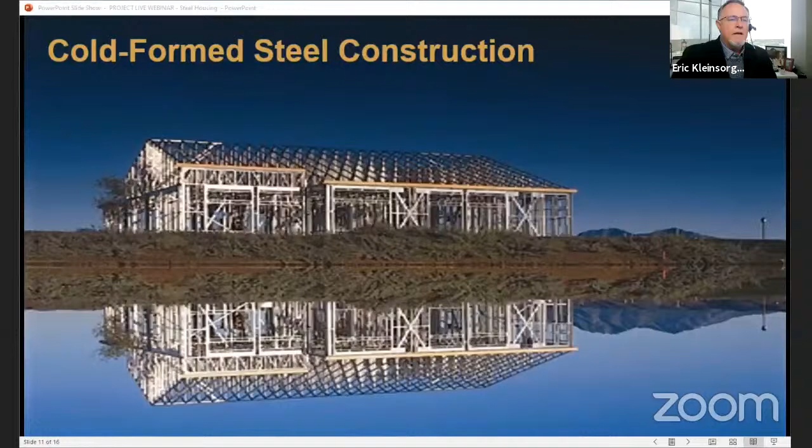So we feel Blair's project is right in line and falls within the scope of what our communities can help with. So at this point, I'm going to turn the show over to Blair. And Blair, if you want, come on.

Hey, Blair. So first of all, thank you for putting together this presentation. Again, it's about 15 minutes. It'll give you a background of the project and what their needs are. And Blair, as I stated, I'll kind of flip through them as you need me to.

Not a problem. To begin with, Eric, Ashley, and all of those that have joined us, I want to thank you in advance for the privilege of your time. Greatly appreciate that. Quick overview of the agenda. Eric, next slide, please.

We're going to talk to you about cold formed steel, also known as cold rolled steel. What we do with it is a green product and how it works into the housing and construction industry. First, we'll give you a little bit of company background, talk about the objectives and benefits, a brief overview of some of the management, our strong management team. We'll talk about the process, and then at the end, we'll open it up for some questions.

This project started, interestingly enough, way back in 1998. The predecessor company was IMHA, which was a joint venture with Bethlehem Steel, and it was all about cold rolled steel framing at that point. Bethlehem Steel supplied the material and did the roll forming.

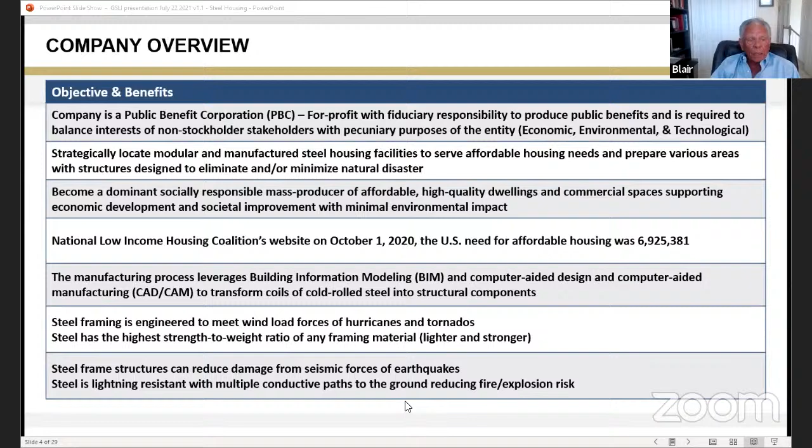In addition to what I touched on, there are some ancillary benefits to us locating somewhere. There's a need for transportation companies, installation and site prep companies.

In addition, we're able to do the production of what is called off-site cold rolled products, such as the steel studs that you see in Home Depot or Lowe's.

We're projecting 322 new production jobs by the end of fiscal year 2, a full 933 full jobs by end of FY5, with a gross employee payroll of over $95 million at that point in time.

We're looking for 65,000 square feet to begin with. We need to be able to expand to 100,000. When we get there, we'll have 65,000 of manufacturing, 15,000 of warehouse, and 20,000 of office.

We need a 35-foot clear span. And as most of you are aware, if it doesn't exist, we can certainly raise the roof, and we would do that just in the manufacturing area.

Likewise, we have the need for 2 drive-in doors and 4 loading docks, but again, those can be added if they don't exist. I know you may have some questions about our electric requirements. We're projected at 215,000 kilowatt hours at the end of FY5.

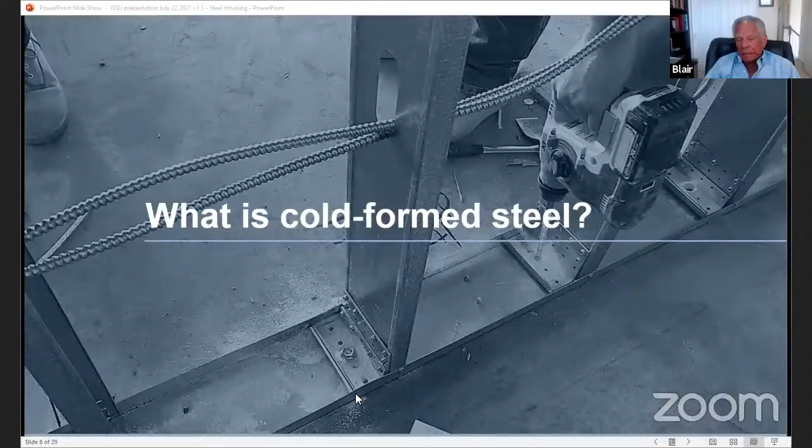A little bit about what cold formed steel is. As you are driving down the highway, you're going to see the big glistening silver steel donuts on the backs of flatbeds. That's where it all starts.

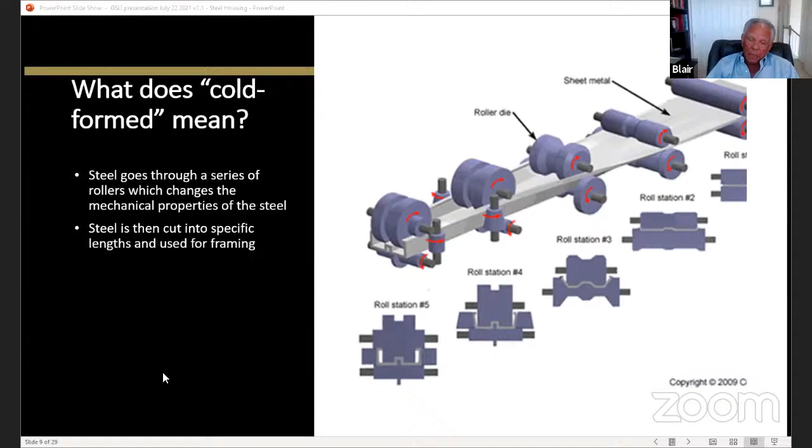In the process, that steel is taken in its cold form and modified so that it meets the requirement as given to it through the computer and as designed in the blueprint.

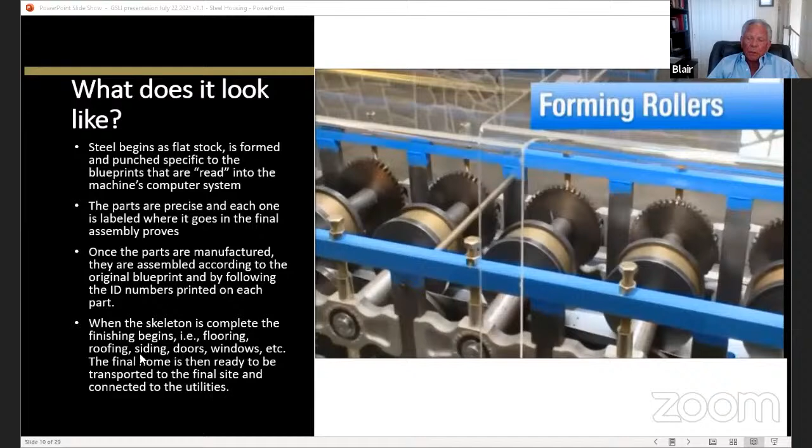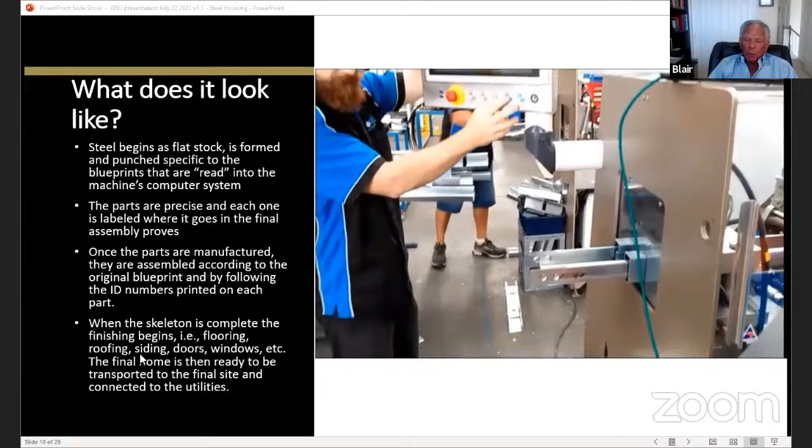You'll notice here on the right the process that happens. The equipment does everything that you can imagine that needs to be done to a piece of flat steel. It does all the dimpling, the punching, the cutting, the printing on it.

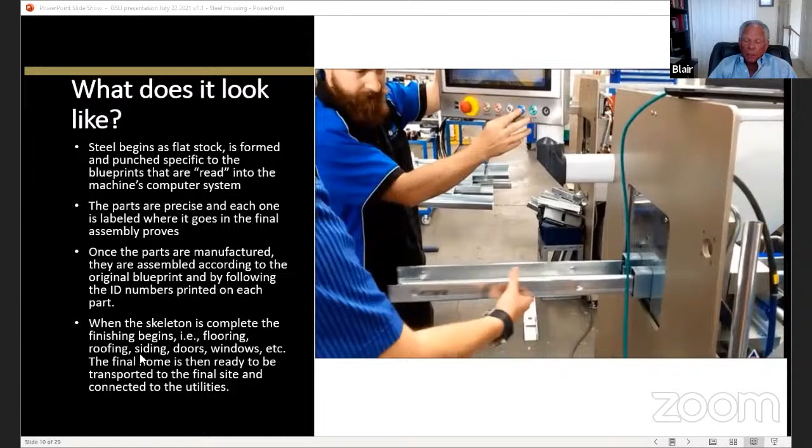Each part is precise and labeled. It's numbered. So when it's all said and done, the assembly folks know exactly which piece goes where. There's no guesswork in it. It goes together very, very rapidly.

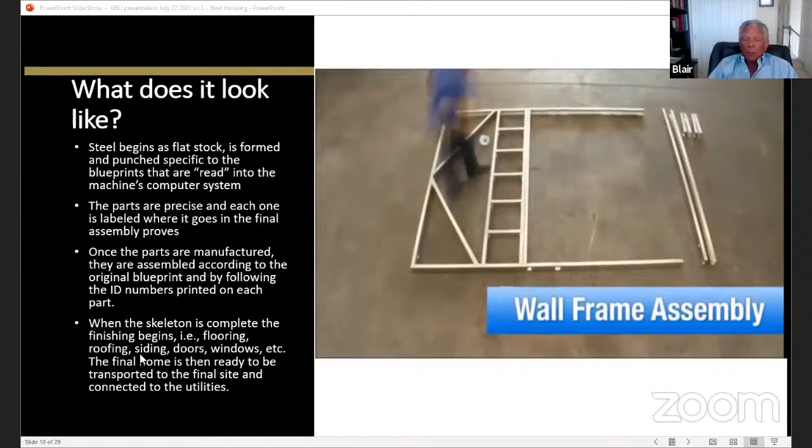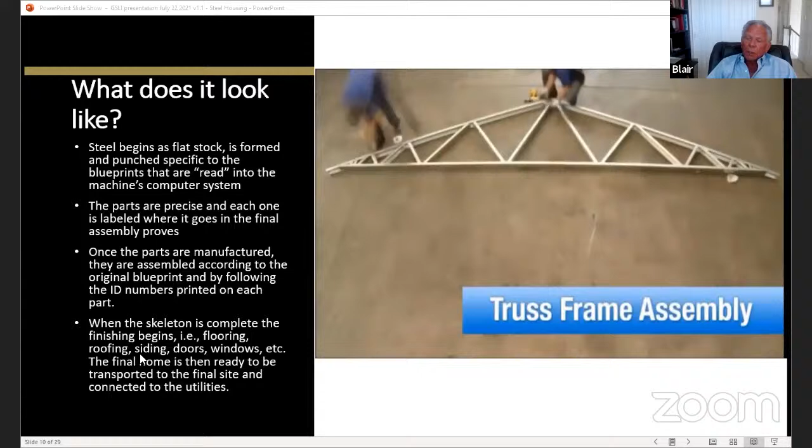When it's all put together, then the exterior and interior, the roofing, the siding, the flooring are put onto it. We put the interior things that need to be done, like cabinets and so on. And once that's all done, it's ready to go onto a trailer or whatever and go to the site.

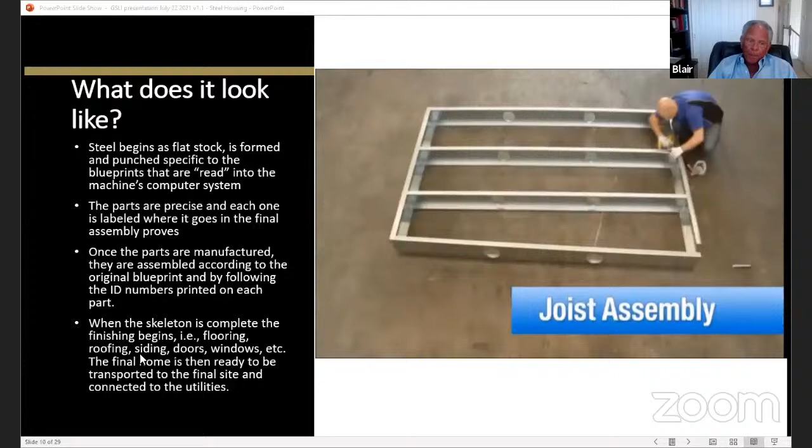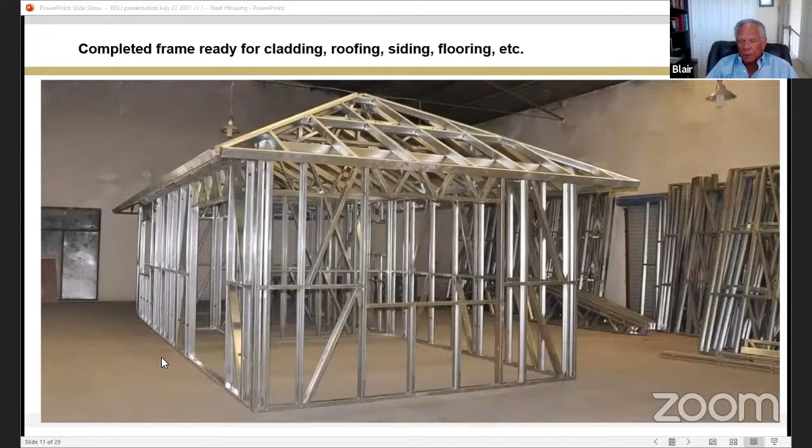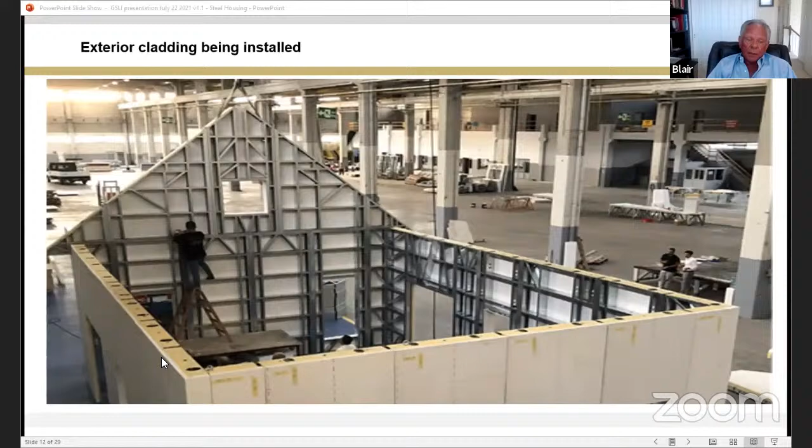Here's what it looks like when it's all assembled, and it's very clean, precise. The next step is adding the exterior cladding. After that goes on, all the utilities are put into the walls, the interior is done, and the cabinetry goes on. Cold form steel is extremely strong, has a lot of applications, from skyscrapers all the way down to retail stores and much more.

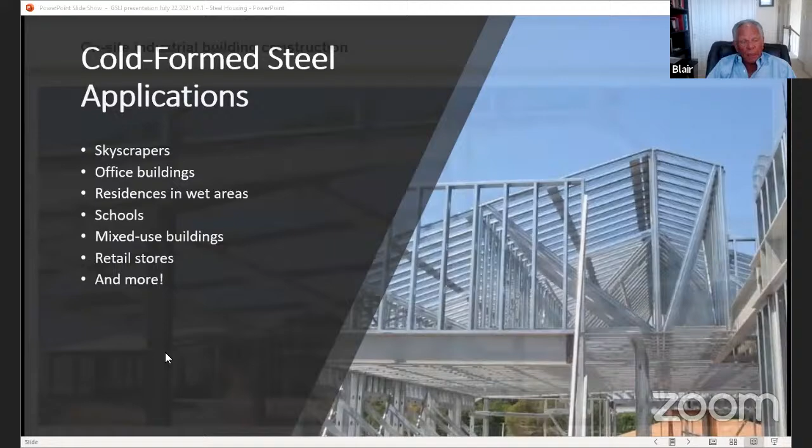We can also do steel framing for on-site construction of industrial buildings. Needless to say, we're not going to build those inside of a factory, so we'll take the pieces to the site and they'll be constructed there.

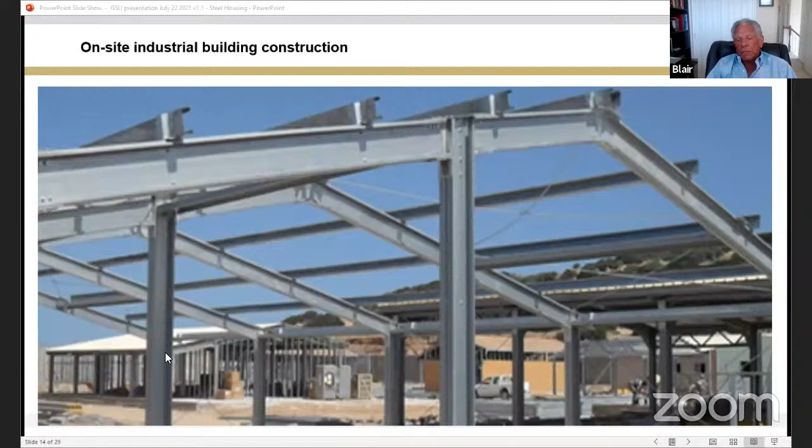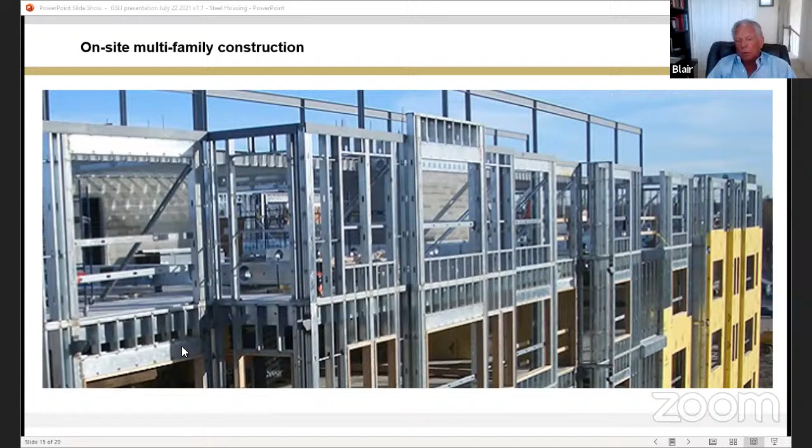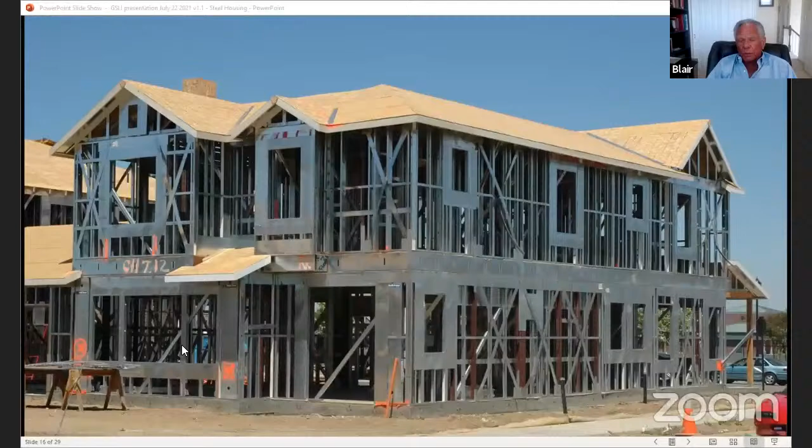It's excellent also for multifamily construction, hotels, or things of that nature. It goes up very easily, it's light. Here's a multifamily building that is all steel framed and ready to have the exterior cladding going on it.

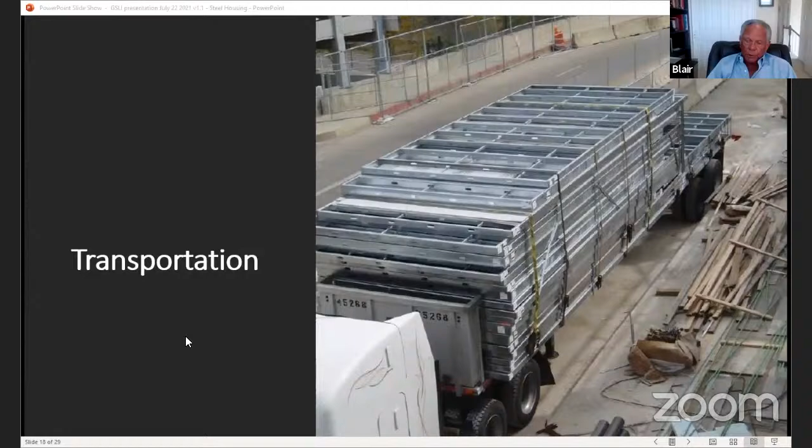We also use a process called panelization, which I'm sure you're familiar with. You've probably seen it today in the construction world using wood. The wood panels are built and put on the back of a flatbed, trucked to the site. Unfortunately, they get to the site, get unloaded, and lay out in the weather getting rained on for weeks before they ever get tilted up and put together. When that happens, you have water-soaked wood building your building.

So, a quick review of what we're all about. Our product meets all the wind and seismic loads designed by code. We can do much greater spans, giving open living spaces. As I mentioned, we qualify as being green by LEED. We talked about panelization, and because we can do it in panels or any other way, it's excellent for mobilization to remote locations where we can't take a totally finished building.

We're cost competitive versus any other construction material. Time is one of the biggest elements that we have. We can build a complete home in about 25% of the time that it takes for any other type of construction, including wood framed manufactured housing. We can build an 1,100 square foot steel frame in 5 hours in our factory.

The material is strong, lightweight. It eliminates pops in drywall, no comebacks, non-combustible material. Obviously, it's inorganic, does not emit gases. You may remember a few years back some homes that had been put into use had a lot of volatile compounds in them. Last but not least, it's termite and insect proof. Termites have a hard time chewing on steel.

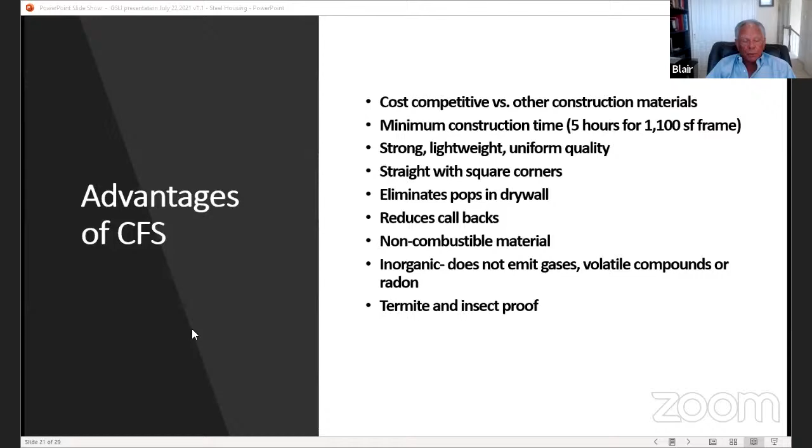Here's an example of some of the clear span. It can go even greater. It gets some tremendous advantages in design. We're able to design and build things that just can't be done in any other material.

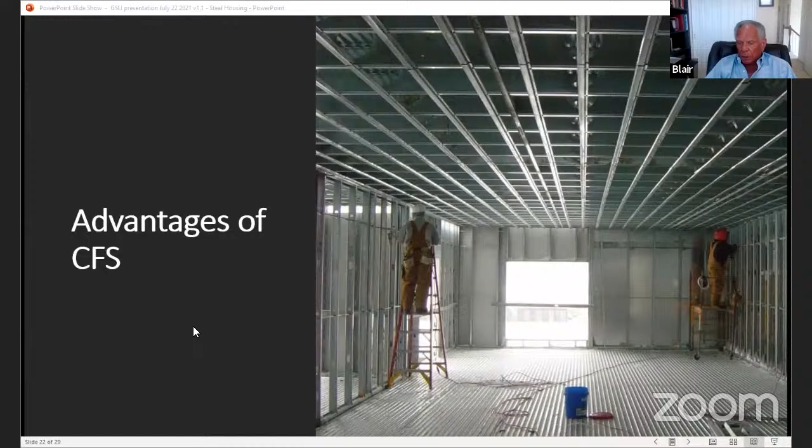Because it's lightweight, we can go up multiple stories with very limited equipment. We don't need huge cranes to take it up, again, because it is lightweight.

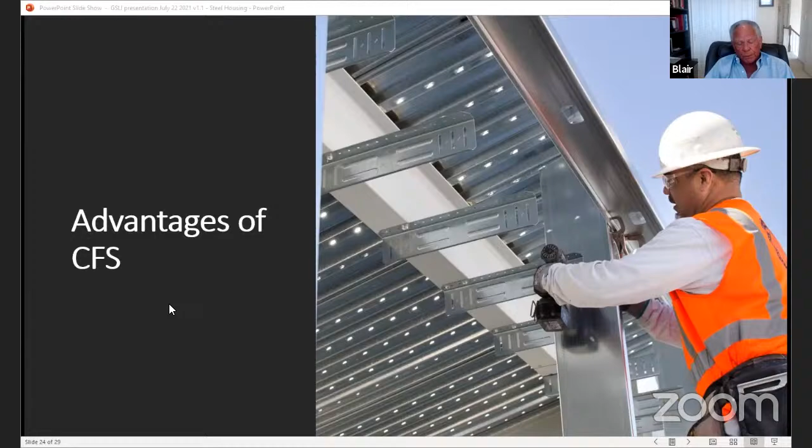This I put in here because I knew I was going to forget it if I didn't. We have a huge training component that is required wherever we go. The folks don't exist that know how to build with steel, so we have to do all of the training to show them how to do that. I might add that our VP of Engineering, Tim Waite, literally wrote the book on it. If you go to Google and search for instructions for steel framing, the Amazon bookstore will show up with Tim Waite's books and his pictures. So we've got a heavy training component.

This is what it looks like if we take the pieces out and assemble them in the field. Again, not a whole lot different.

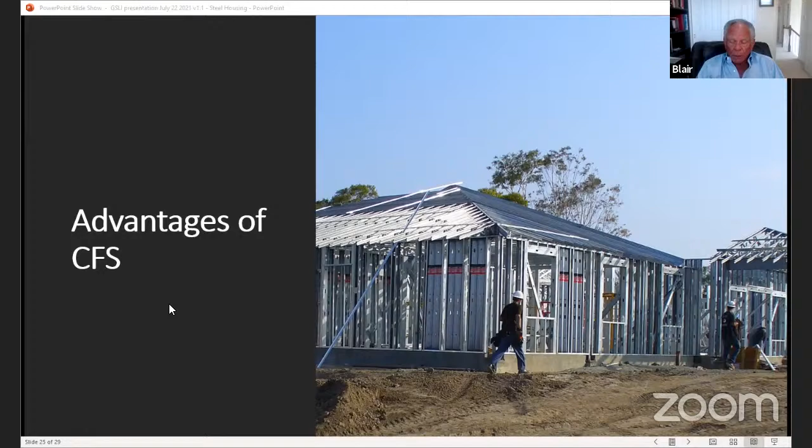Our organization, like many others, has very strong backing from some lobbying groups: American Iron and Steel Institute, Steel Framing Industry Association, and the Cold-Formed Steel Engineers Institute.

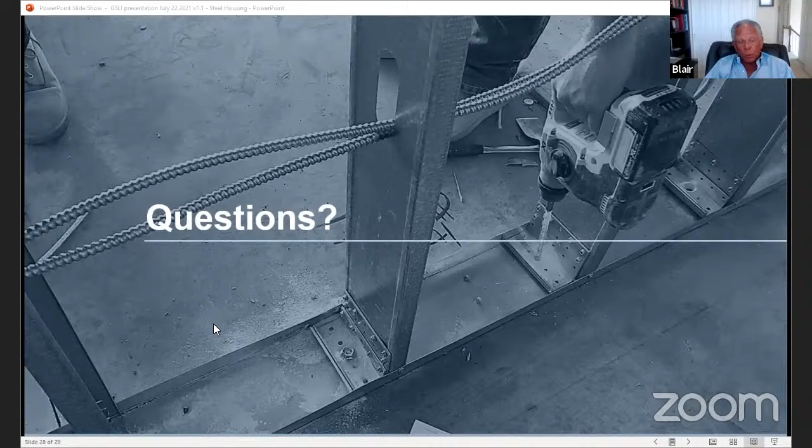That's where I come to the point and say, okay, what can I answer for you? Yeah, thank you so much, Blair.

I really gained a lot of education in terms of not just the application, but the fallout benefits of additional cluster industries coming in to support, which also create additional jobs. And so I'm really excited about working with you guys.